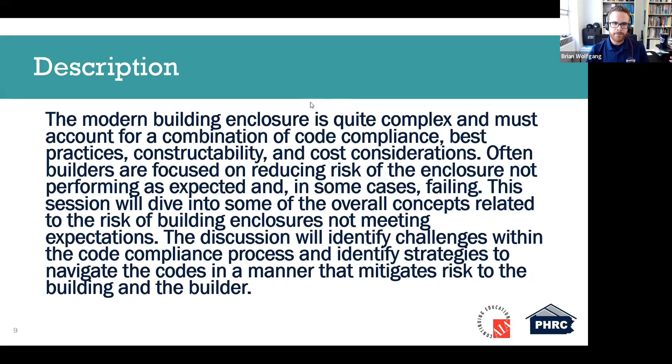You see some information about AIA here, and on your screen now you see the description for this session. Hopefully you had a chance to look at it. It's pretty general, just talking about the challenges associated with a modern building enclosure. It presents a lot of risks. Certainly building professionals, builders and design professionals understand that this is an industry that carries with it quite a bit of risk. But what we're going to dive into today is risk as it's associated with the building enclosure, but also more specifically as it relates to the code compliance process.

We're going to look at how plan review and inspection processes may influence this risk mitigation and risk tolerance. We'll look at some strategies as well to ensure some proper performance. We're going to give some recommendations to those tuned in. And ultimately, we're going to try to avoid those building enclosure failures, because those implications are pretty profound.

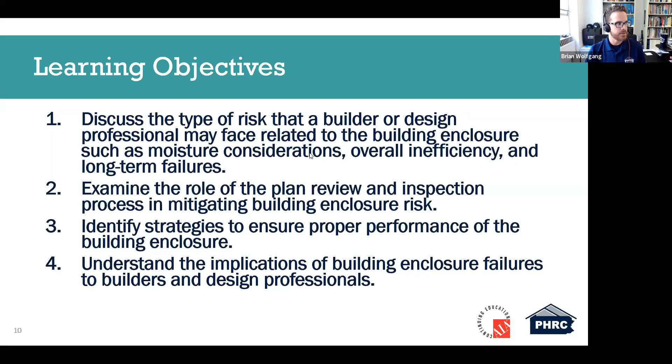So we're going to attack this from a couple of different angles, but I just want to take a moment to talk about what I think our goal should be for today. Chris and I, we celebrated - I don't know that we celebrated properly, we should have had a much larger celebration than we did - but we've been at the PHRC for a decade now. This webinar is really born out of the experiences, the anecdotes that we've heard over that 10-year period. And I think ultimately, regardless of what I'm bringing to this discussion, our industry is in a really important and interesting point in the trajectory of how we build.

I think that the modern residential structure, we're looking at all of this through the lens of the IRC, so a lot of single family and some attached housing as well. We're at a point now where I think a lot of the builders that we interact with, looking at the Pennsylvania and regional market, they've adapted to some of the more significant changes we've seen, a lot of them coming through code compliance changes under the Uniform Construction Code. We're still seeing challenges coming out of some of those code changes, but I think in large part we've gotten over some of those hurdles and are at the point where we can begin to reinforce our approach to how we design and build.

I think there are two main benefits to this idea of reinforcing our approach. The first one is, I think we need to better understand the assemblies that we're building. I know oftentimes we run into folks who are in almost triage mode with the code compliance process, which is just get me through to get my CO. But then I think it's important to be able to understand more deeply the way that we build, regardless of the reason why we build that way.

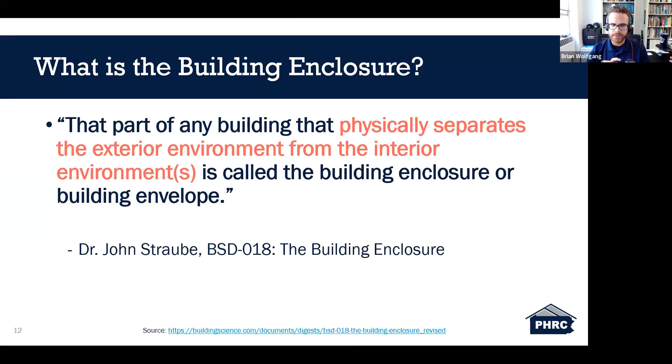I want to reinforce that the building enclosure is not defined by one or two components. It's really defined by assemblies and systems, and we see that when we look at the way we build.

Looking at how this intersects with code compliance, some of these things are determined or dictated by code compliance, and many are under what we'll call best practice. You may have a way that you build that works, and ultimately that should be defined by your performance goals and the product you're building.

In general, we see times where best practice and minimum code compliance are aligned, and many other times where they're pretty far apart. We're going to try to acknowledge that as we go through today.

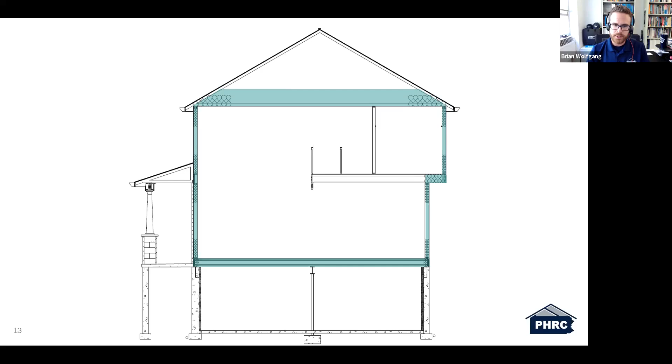Oftentimes, as you may have seen in our other sessions, we like to define the building enclosure by 4 functions we're trying to accomplish. We list them in a subjective order of importance, starting with structural support, then our control function, looking at heat, air, and moisture as primary control functions.

We also understand that smoke, odor, sound, fire, insects, etc., are critical elements of that control function. We can't forget the 3rd and 4th functions either: aesthetics, our interior and exterior finishes, and how the intersection of those other 3 goals with distribution of services like mechanical, electrical, and plumbing present their own challenges.

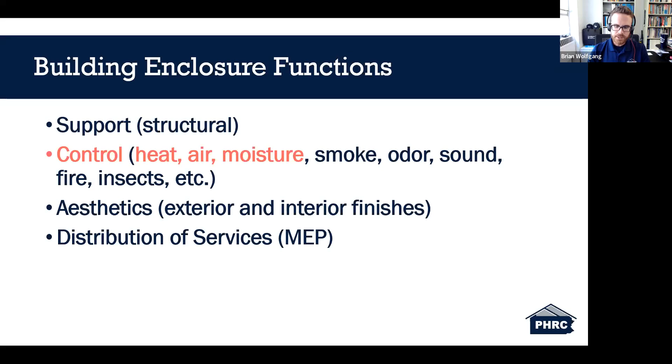So again, just trying to acknowledge that there is a lot at play when we are designing and building our enclosure, and we're going to spend some time today really digging deeper into the code compliance aspect.

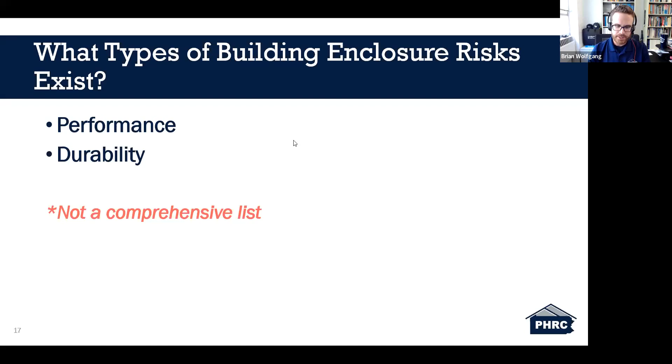There are other much more detailed risks within the building enclosure, but I mentioned these two so that we can continue through our discussion today. But like I said, this is opening up a pretty big discussion point overall. So more specifically, if we're trying to acknowledge that navigating the code compliance process is going to introduce perhaps a bit of risk for mainly the builders and the design professionals, I've defined two different specific types of risk. Again, not trying to portray these as a comprehensive list, but I'm going to refer to these as false equivalency and mistaken identity.

So if I had to summarize these, and we're going to spend our time today digging deep into both of these, but if I had to summarize them, the false equivalency is assuming minimum code compliance is an adequate substitute for proper design. The second one is mistaken identity.

To summarize this, assuming plan reviewers and inspectors are performing quality control functions. Now, perhaps your response to hearing that is, that's not me. That's not how I build. That's not how our company builds. And I understand that. Which brings me to my disclaimer slide.

It's always fun to have a disclaimer slide in any of our webinars. But I really want to give you a little bit of background into why we're having this discussion. The idea of building enclosure risk was brought up in a discussion with our advisory council earlier in 2023. And I believe that a lot of

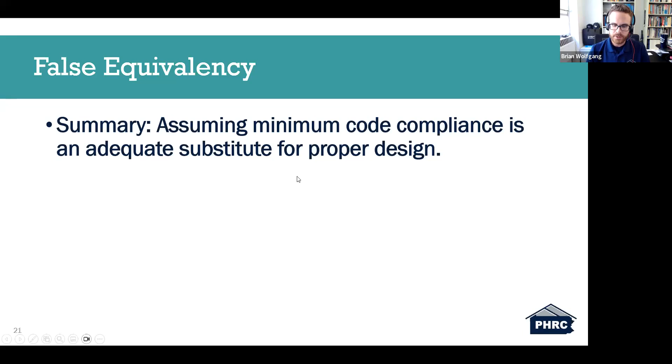Now, perhaps this is an exaggeration, right? To truly throw up your hands and say, I don't need to design is probably a rare occasion. But the idea is that I can pull back in some manner from the design process, reduce my emphasis on design, because I'm relying on what has become an increasingly stringent code compliance landscape. And I think that there's some amount of that attitude that's probably fairly common in a lot of projects, whether we like to admit it or not. Again, this is not based on hard data as much as it's based on observation and anecdotal evidence over the past 10 years that I've had in this industry.

So let's take a look, setting the landscape a bit more, and what you see on the screen are some images of our code books.

We're looking at the Uniform Construction Code, specifically the Energy Code, and we'll use this to illustrate some points. We know that in Pennsylvania we're enforcing the 2018 International Residential Code as our base code, along with the residential provisions out of the IECC and the 2021 Pennsylvania Alternative.

That lays out how we navigate the Energy Code, which has a pretty big influence on the building enclosure overall. In Pennsylvania, we start to dig deeper and understand that often prescriptive requirements, not everyone follows prescriptive, but generally prescriptive requirements within the Energy Code really dictate how some builders and design professionals are building and designing. We have climate zones 4, 5, and 6 on the climate zone map on screen, and we'll cherry pick some more complex requirements in the prescriptive code to illustrate some points.

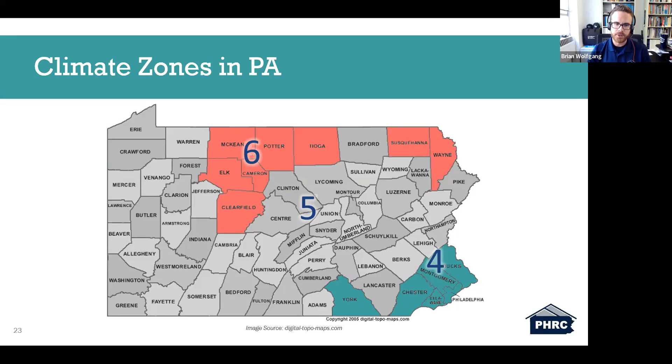To broaden this discussion, we're not at a plateau for energy code stringency. It's likely we'll encounter additional challenges once we see what's adopted in the Uniform Construction Code out of the 2021 review.

We've had these discussions over our years of training as these code changes have come through. But again, the general idea here is acknowledging the bigger picture: what's the role of design in this overall process?

To broaden the scope a bit, we're zooming in and out as we go through this discussion. The Department of Energy has a chart estimating the improvement, or efficiency, of the residential and commercial energy codes.

I'm going to look specifically at residential, as defined in the blue line. We've come a long way in not an entirely long amount of time in terms of stringency in the energy codes, and there are a lot of reasons for that, with certainly a lot of benefits.

But my argument here is that we've started to see a lot of things converge in how a builder might view what many call minimum code compliance as being the worst way that you can build a house legally. Not my words—again, I've heard these from many folks.

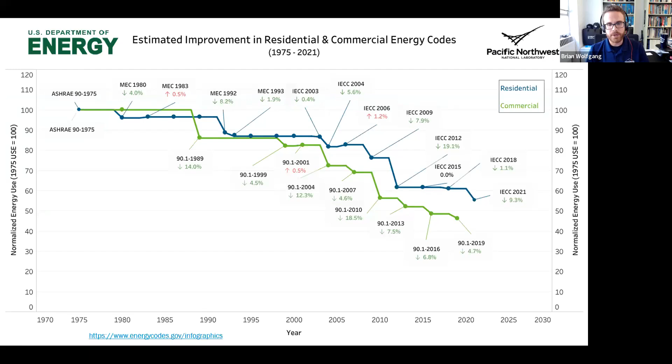I've worked for 10 years to avoid sharing many opinions, but I'm going to share more of an interpretation of what I see a lot of builders running into as far as challenges—the idea that as code minimum and accepted best practice converge, builders and design professionals tend to view enforceable building codes as design guidance.

And some code-compliant outcomes, many are aware, carry tangible amounts of risk. So to flip that a bit, I would argue that the larger the gap between code minimum and accepted best practice, the greater the perceived need for design.

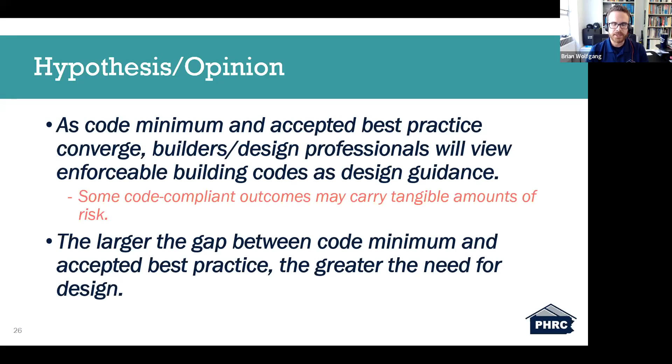Now, if you're reacting to this and saying, well, I'm so far above code that doesn't apply to me, then in many cases you're getting into a whole new world of risk, because some of those complex systems you may be encountering are really incorporating new materials and new systems. It's this idea that the convergence of code minimum with what many see as best practice presents challenges in how we approach the building and design process.

I think one of the contributors to the risk we see is actually not related to energy, but to moisture. We can't forget about moisture. I've shown these statements before in a lot of the training we do. Just to summarize, as residential buildings have become more energy efficient, the enclosure is becoming more sensitive to moisture-related damage. We've seen this time and time again, in singular examples or broader examples, like the issues we've faced with things like hard coat plaster, stucco, and stone.

But just to summarize it, the airflow and heat flow through buildings in the past, when buildings were less efficient and less airtight, used to provide some insurance against moisture-related damage, because you had some drying of your walls from that air and heat passing through. Having less airflow available within our assemblies to provide that drying, maybe unintentional drying, means that it puts more emphasis on how we build our buildings. We have to get our details right because we're trying to comply with a more stringent approach to building.

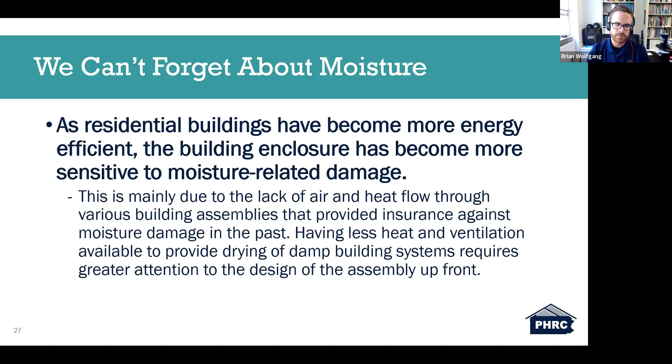To look at it a different way, if we want the benefits of a more energy efficient building, we have to make sure we get a lot of these other enclosure details right the first time. What we don't want to see is what we commonly were looking at in parts of Pennsylvania that faced stucco and stone issues more rampantly, which was buildings under 10 years old having moisture-related damage, where your wood-based products got to a moisture level that was unsustainable. And we saw rot in things like OSB, but even our solid sawn rim board and our bottom plates.

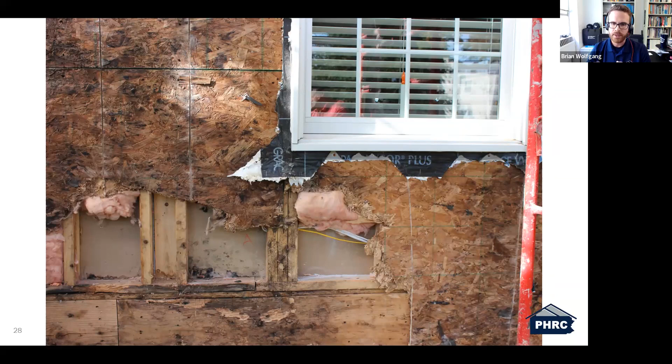Again, just trying to acknowledge that there's some risk there, not seeing this in a fully comprehensive manner. I'm not saying that codes are the reason why this failed. What I'm trying to say is that a more airtight, more energy efficient building meant that these systems were a little bit more sensitive if you didn't get the details done right the first time.

So let's look at an example. I'm going to use four examples as we go through this. The first example has to do with assembly drying potential above grade. What I'm trying to acknowledge is that there are some specific scenarios where if you're not properly pairing design with a code compliance process, you may run into some risk. Some options for above grade wall assemblies might lead you to an energy or code compliant wall assembly that includes exterior vapor retarders or vapor barriers.

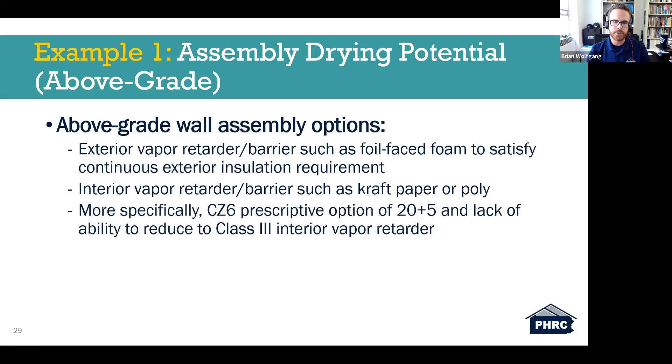Such as foil-faced foam, to satisfy your exterior insulation requirements, that also have a requirement for an interior vapor retarder of a class 2 or class 1, which would be a vapor barrier, such as kraft paper or poly. If you're familiar with why that's a bad thing, we need to really dive deeper into drying potential, which we will in a moment. Under the current enforceable code, the prescriptive requirements for climate zone 6 require or give you an option of a 20+5, so R20 in a wall cavity and then R5 continuous on the exterior of a wall. I want to dig deeper into that to see where the risk comes from in that example.

But I do need to define what I mean by drying potential. When we look at our building enclosure assemblies, we have to assume they're going to get wet. They will absolutely get wet. I'll say that the example of the building I'm in, which is actually on the docket to be torn down, so we're on our last legs here in Sackett Building. I know there's moisture that gets into these walls, but in all of our building assemblies, we have to assume some level of moisture will be present, and then we have to accommodate that by making sure it can dry.

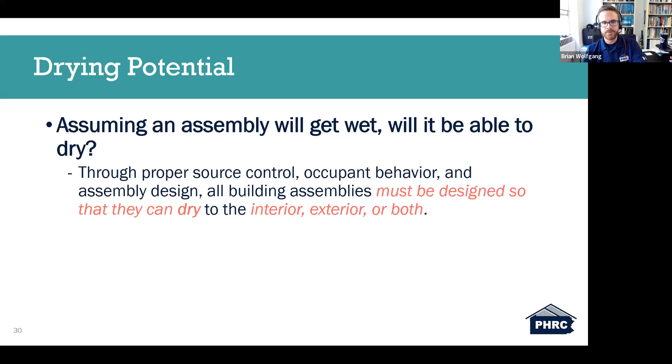So we can do that through source control, occupant behavior as much as we can influence, but also generally assembly design, so material specs and system specs. They need to be designed so that they can dry to the interior, to the exterior, or both. You need to allow these assemblies to dry in one way or the other.

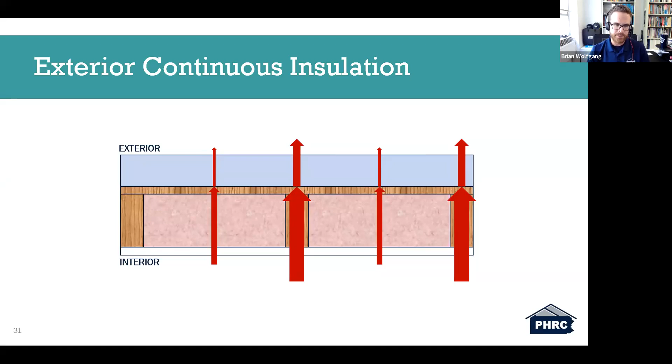So we can look at exterior continuous insulation and understand that there's a benefit there from a thermal bridging standpoint. You're not eating your sweater, you're wearing it, as they say. So that exterior layer, not always foam, but sometimes and many times foam, will provide some additional R value over top of your framing as well as over top of your wall cavities. So we understand that there's an energy benefit there, but there's some additional risk when it comes to condensation control and drying potential.

So like I'd said, there's only one climate zone currently in Pennsylvania out of the 2018 insulation and fenestration table that requires it prescriptively within the IRC or IECC. We're not talking PA alternative just yet. That 20+5 option is an option that many have acknowledged carries some additional risk. So let's dive into that a little bit.

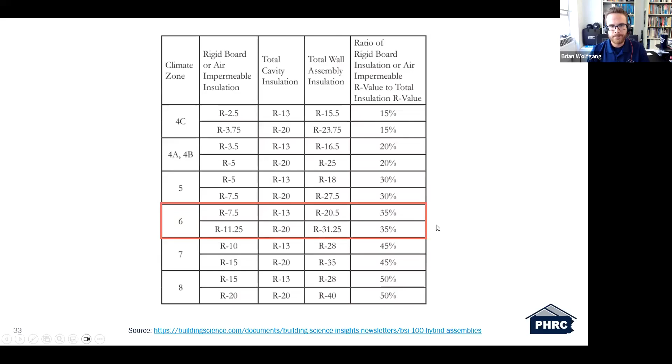If we dig into some of the reasons why this may carry some risk: in climate zones 5 and above, we're looking at the requirement for a class 1 or 2 vapor retarder. In section 702.7.1, there's some additional considerations for dropping your interior vapor retarding layer to a class 3. So a class 3 vapor retarder would be more vapor open, and that's permitted in certain instances.

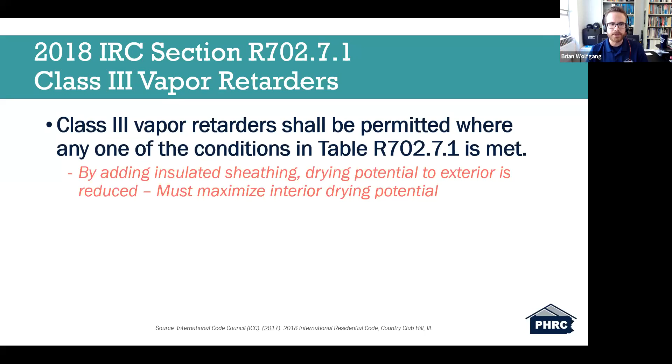And when it comes to introducing exterior insulation, if you're using a material like a foil-faced foam or even an extruded polystyrene, those are either going to be vapor retarders or even vapor barriers in the case of foil facing. So we're not going to be drying to the exterior at a high enough rate that we may desire, meaning we're going to want to maximize our interior drying potential. So the idea of dropping to a class 3, allowing our drying to occur to the interior, is desirable.

If we look at the table that's associated with that section, looking down at climate zone 6, we're looking specifically at the 2x6 wall. So looking at the last line, it says you can drop to prescriptively a class 3 vapor retarder if you have continuous insulation with an R value greater than 11.25 over a 2x6 wall. So what you end up with as prescriptive requirements for code compliance, if you choose the option where it's required of 20 plus 5, it would mean that you could have a code compliant assembly that has foil-faced foam on the exterior and still have a class 1 or 2 vapor retarder on the interior.

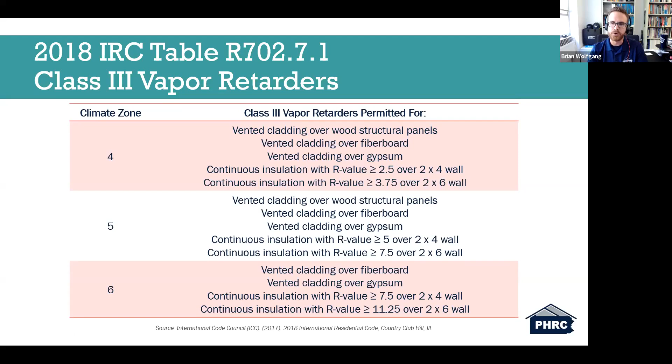And that presents challenges. There are a lot of ways out of that scenario. But what I'm trying to acknowledge is that even though that option may be code compliant, it may diverge from best practice. So my recommendations when you're considering this idea of above grade drying potential would be to select materials with an eye toward drying potential. There are materials that are more vapor open that you could include that would qualify or that would function as continuous exterior insulation. Also, exterior continuous insulation thickness should consider condensation potential.

There are a lot of resources that can help you through that, including the document I shared. I'll have some additional recommendations here in a moment. And the last one, again, view code compliance as only one step in the assembly design process.

One thing I think is important to consider is that it's tempting, based on what I've heard from builders we've talked to, to see a requirement for exterior insulation as something they're not already doing. Some may ask, what is the least disruption to my process that will get me through code? For those already building with 2x6 walls, the least disruptive option may seem to be adding R5 to the exterior and leaving everything else the same.

While that might be code compliant, what I'm trying to acknowledge is that it carries risk when it comes to the drying potential of that wall. I'm not saying it's a guaranteed failure, but your risk goes up while code compliance remains the same. So these recommendations really mean that needs to be designed, not just selected.

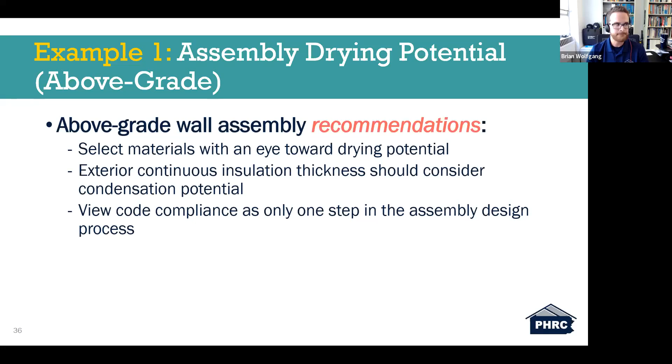So let's keep going here. I've talked to a few people today about how much I talk, so I should have known I'd probably be a bit long-winded with this discussion. But let's look at example number 2.

Still talking about assembly drying potential, but let's go below grade. There are a whole host of challenges when you get to below grade wall assemblies, both in new construction and existing construction. There are some options that can lead you down a path that presents challenges when you're looking at what's code compliant versus what's best practice.

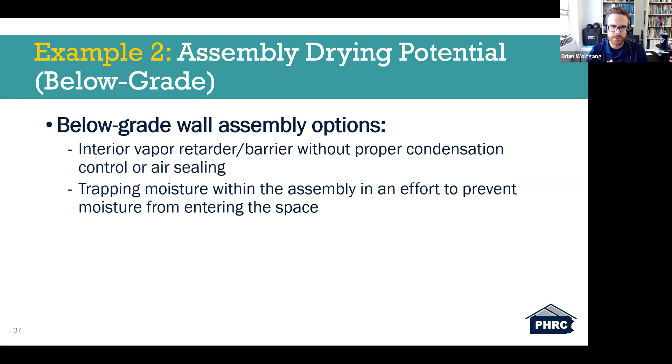There are some common options where you'd have an interior vapor retarding layer or vapor barrier without proper condensation control or air sealing. What I mean is introducing a vapor retarding layer, perhaps on the interior face of wall framing, without properly preventing interior moisture-laden air from getting into your wall assembly and finding cold surfaces in your foundation wall assembly. So let's look at it a little further.

More specifically, in zones 4, 5, and 6, we have requirements for basement wall R-value of 10/13 or 15/19. The first number represents your continuous R-value requirement if you aren't insulating wall cavities. The second number would be if you frame a wall and insulate your cavities.

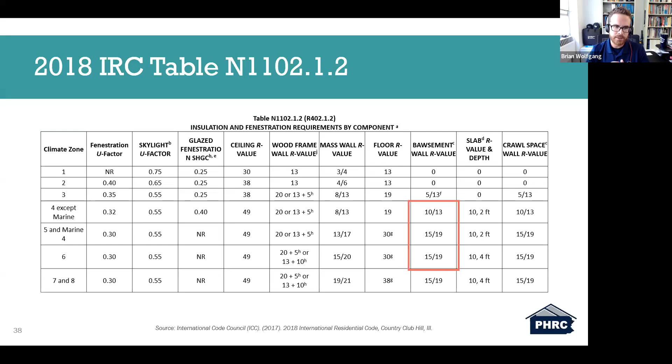Looking at common options here, in zones 5 and 6 you'd be looking at, as an example, 3 inches of extruded polystyrene at R5 per inch, or a 2x6 wall with a minimum R19 in the cavity. The challenge we see all the time is trying to determine what's going to be a proper balance of cost, constructability, and ultimately proper best practice consideration in this assembly.

What we've seen as recommendations for best practice here is essentially acknowledging that once you're away from the wall, you really need to prevent any moisture that might be within the wall assembly from getting trapped. What I mean is, if you're insulating that wall with air permeable insulation, like fiberglass batt insulation, you really shouldn't be putting anything on the interior face that would trap that moisture or slow down the rate of vapor diffusion, if you can avoid it.

So it's okay to include vapor retarders or even vapor barriers, based on a lot of recommendations, if it's in direct contact with the wall. That wall does not have to dry. It can stay at an elevated moisture content. But once you get away from it being in permanent contact with that wall, any moisture that's in that wall assembly needs to be allowed to escape.

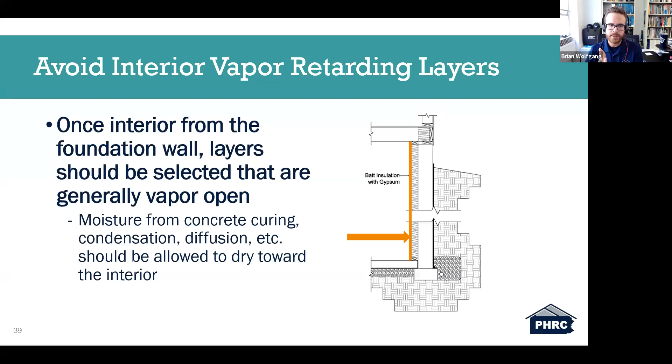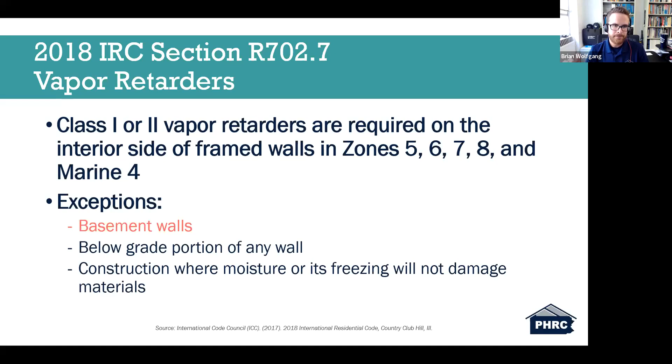So again, once interior from the foundation wall, layers should be selected that are generally vapor open. To look at some code context for this, we have that requirement in 702.7 of a class 1 or 2 vapor retarder being required in zones 5 and above. They do offer exceptions for below grade portions or a basement wall, but they don't require the elimination of that vapor retarder.

So what I mean is it's entirely code compliant to do what we just said you shouldn't do, which would be to include a vapor retarding or vapor barrier layer on the interior of a framed wall, and then have air permeable insulation behind it without proper condensation control.

Here's a great quote from a PNNL document: if water vapor is allowed to pass through the below grade wall and the insulation, it must be allowed to dry to the inside of the home to avoid condensation in the wall cavity.

It's really important to consider beyond just what gets you through the code process, and what may be the best practice from a moisture standpoint.

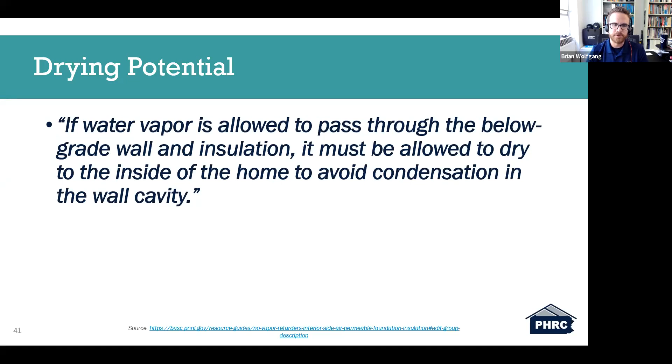So some recommendations here: ultimately use moisture tolerant materials in contact with your foundation walls. That's just a broad recommendation. But generally speaking, once air permeable insulation is included, you need to avoid interior vapor retarding layers.

But there's another recommendation here, which is to look at condensation control. Design that wall assembly so that the farthest into your wall assembly that your moisture-laden air can come in contact with is not going to be below the dew point of your environment. That will help you avoid those condensation issues.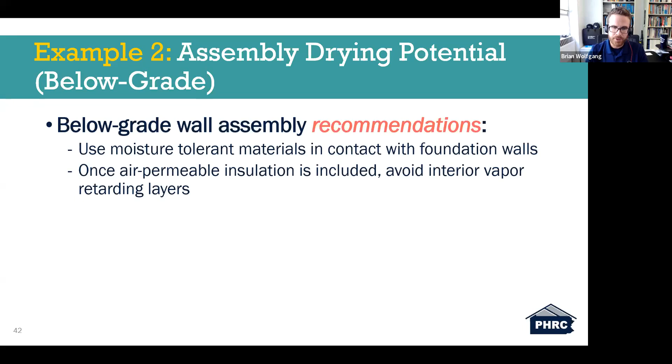So generally speaking, when we're looking at this idea of false equivalency, my recommendation is to bring back more of a design focus into the overall residential construction process. And I'm not saying architectural design, and I'm not saying that this is uniform across the board.

But when it comes to the building enclosure, if you're not intentionally designing, someone's going to be unintentionally designing for you, meaning that you really need to approach the building enclosure with a design mentality, not a checklist mentality.

Getting through the code compliance process is not an adequate substitute for properly designing it to make sure that you're looking at those risks of performance and durability. And ultimately, someone needs to be responsible for the design of the building enclosure assemblies.

I'm not going to tell you who that is. I'll tell you probably it shouldn't be your code official. I know there's some code officials who do their best to acknowledge what you shouldn't be doing, even though it might be code compliant—they see a lot and they offer those recommendations.

But really, in many cases, you should be bringing someone into the team and defining their scope of work to be designing this properly to mitigate risk.

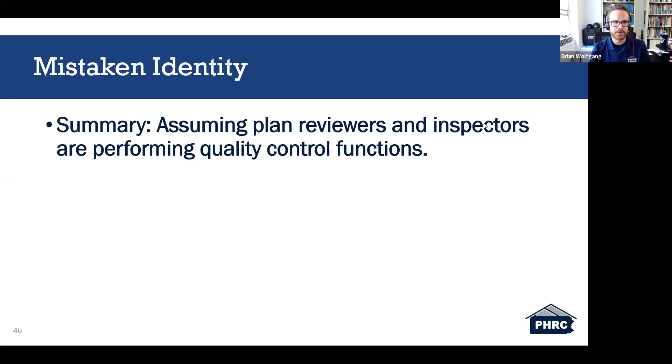So, if you're a builder and you hire a new subcontractor for your enclosure, do you have procedures in place to ensure that they're using the right materials and following manufacturer instructions? I think that's the example we're going to show.

So I'm going to say this, and perhaps there'd be folks that would have different definitions of what the code official should be doing.

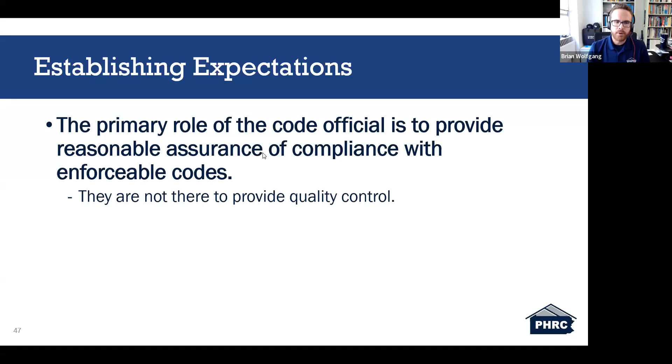I think the primary role of a code official, when I'm approaching my relationship with a code official, is they're providing reasonable assurance of compliance with enforceable codes. There's an inherent spot check approach to a lot of the inspection processes, just because of the overall breadth of items that need to be code compliant, which means you can't assume that if there was an issue it will be flagged on your inspection report. At some point, if you make that assumption, you're assigning them with a quality control function that they really aren't there to perform.

So if I give you an example, it's one that many of you see. You can even say you see it on your competitors' jobs when you drive by, you don't have to admit it's on yours. There are times when using proprietary materials presents a challenge because you're jumping outside of the code. The code may generically say manufacturer instructions are important and must be complied with, but the actual installation really needs to be reinforced with an understanding of how the manufacturer wants you to install that product. Some manufacturers do a great job of going above and beyond to make sure contractors understand that process, but proprietary materials require adherence to something outside of the code book.

So some challenges can arise there when we're looking at material compatibility. I'm really starting to get into specifically the water-resistive barrier, your drainage plane. There are a lot of new materials that continue to come on the market. It's one of my favorite things to look at the International Builders' Show every year, just to see what the new tapes, liquid flashing products, and new wraps are. But that is inherently introducing variability, complexity, change. And I think in this context of this discussion, it's really reinforcing that we need to take a look at how we approach this.

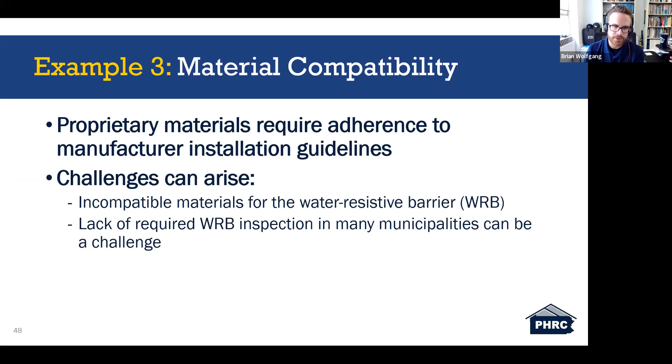I think in Pennsylvania it's also interesting because the water-resistive barrier is not a required inspection item under the Uniform Construction Code. So some municipalities may include it, but even if you're assuming that a code official will perhaps flag you on an issue if something's done wrong, that's not even a required inspection. That's even further removed from what reality may be.

So just showing you an example, and to be entirely clear here, I'm not making comments about any of the manufacturers being shown, but what I am acknowledging is that there is a tape made by one manufacturer being applied to a wrap manufactured by a different manufacturer. It's not uncommon to see a mix and match of materials from different manufacturers, and sometimes it will be approved by that manufacturer. In this case, it would be the wrap itself - that water-resistive barrier manufacturer is the one that would ultimately say, here's the list of our approved products to be used to flash your openings and to seal your joints and seams.

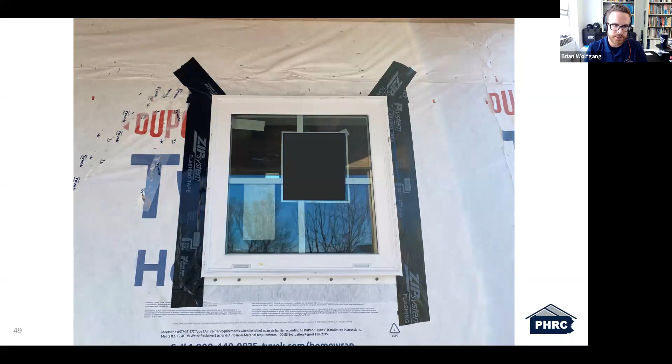But what I'm trying to acknowledge is, who's responsible to make sure these things are being done right? If a new subcontractor shows up and they're used to using a different system, and maybe they have leftover products from a different job, and they take the mentality of 'it works over here, it might work over here' - there needs to be a little bit more of a communication and quality control process in place to make sure that doesn't lead to issues down the road.

So the recommendations I'll try to show you here really just come down to a communications task, which is making sure someone is verifying compatibility and communicating those material specs to subcontractors. And I talked specifically to a code official about this - hypothetically, is that something you look at when you're going out to the site, if you happen to see a job at that stage of construction? It was an interesting discussion - perhaps they'd say something to the builder, but it's really not the code official's job to understand the complexity of some of those manufacturer installation instructions. There just needs to be a little bit more communication here, because as proprietary materials keep coming on the market, I think it's really important that quality control is better defined on our projects.

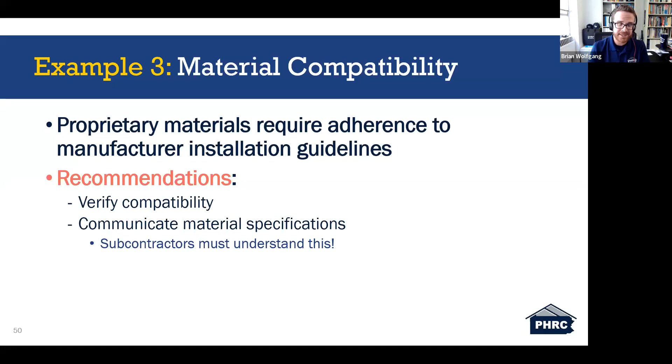I'm again also tying this back to exterior insulation. There's a chance that more climate zones in Pennsylvania are going to be required to install continuous exterior insulation. That's going to introduce an entirely new body of options when it comes to different materials and whether or not they're compatible with different tapes and sealants. Those are things that need to be investigated, and communication needs to happen.

In the time I have left, I want to acknowledge one other example, which goes to a slightly different approach but is ultimately related to code compliance and risk in the building enclosure. We hear this quite a bit: there are some areas of the state where blower door testing is not a required task, meaning in new construction, to get through code compliance requirements for airtightness, there are code officials that are not asking for the results of a blower door test.

I'm not here to tell a code official what to do or not do, but we get questions a lot from builders saying, if I'm not required to show the result of the test, am I still required to meet the requirement? Running the test doesn't do any air sealing for you, but it's verification that you met the 3ACH50 requirement for the structure.

So our general recommendation in this instance is that yes, you are still required to meet the intent of that section. Ultimately, if you deliver a product that is not airtight to the level of 3ACH50 or less, but you were able to pass your inspection because you weren't required to show proof of that, I think that presents a challenge to not verifying that the 3ACH50 is actually complied with.

Again, this represents the idea of what we're seeing as validation of the design and construction process as it comes through the code compliance process. I think there needs to be a broader approach to this that includes a lot of design, and sometimes might even be in direct conflict with code requirements or what the code official is asking for.

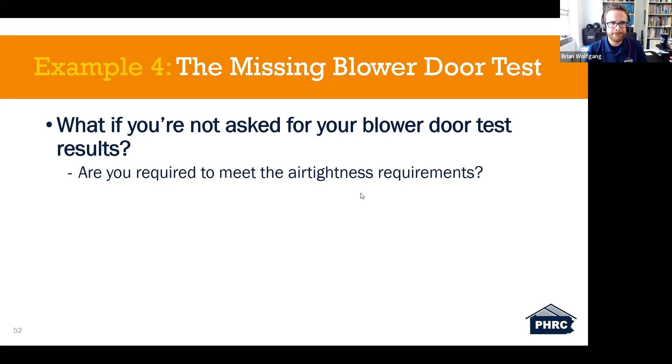So just to take a moment to review, and then I'll dive into questions. I know I'm coming up on 2 o'clock. The building process and the design process are inherently laced with risk.

We understand that's just part of the job. But when it comes to approaching the building enclosure and the conditions we're in right now in our market, I think there are some specific risks if you don't take what I'd argue is a proper approach to the code compliance process.

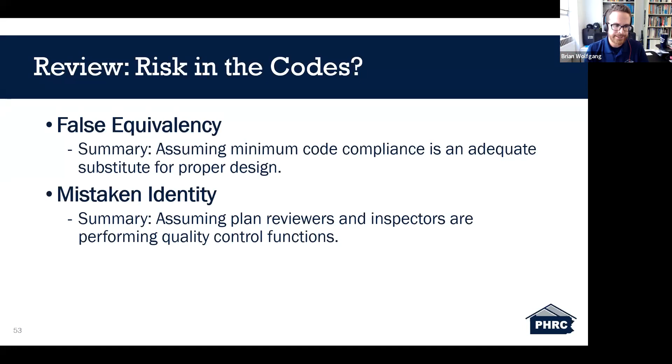Again, I think making the assumption that code compliance is an adequate substitute for proper design, I think is going to present more risk to you. And also assuming the plan reviewers and inspectors are performing quality control without also ensuring you have a robust quality control system in place, I think also presents additional risk.

But ultimately, my recommendation in response to this is that it really should prompt some self-reflection, some evaluation of the way that you build and design. And again, the fewer assumptions that you make, the better off you'll be.

And you may be fine now, and you may walk away from this webinar saying those are not my problems. But I think you should consider, is there any possibility it could become my problem? Because you can't always assume things will go well. I think small changes can have big outcomes.

We've talked about what these changes could be, and these aren't just me dreaming up what these problems might be. This comes from conversation after conversation with a builder, code official, or design professional who has run into this in the field, saying, I don't know how we got here. Then we dive into it and acknowledge that some of these changes, from conditions that used to lead to success, might present challenges that need to be navigated.

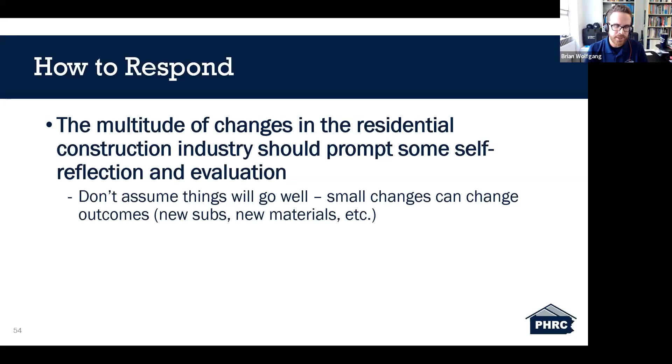So ultimately, the rest of our season this year, and ultimately the goal of the PHRC, is to support you through challenges, whether they relate to the building enclosure or not. So I hope you see this as an opportunity to engage in dialogue with our team moving forward. We'll certainly have some questions answered today as well. So thanks very much.